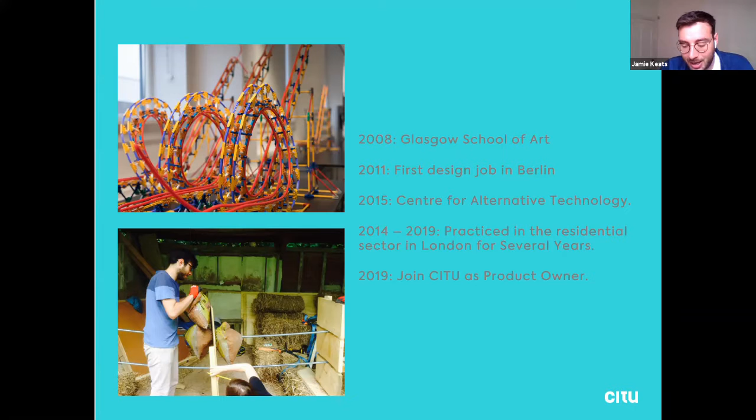Then I spent a lot of time working in London, focused on sustainability in residential practice, but it was always probably more of a second thought for people, something they wanted to do but never could quite manage to prioritize. Just over 2 years ago, I joined CITU, which is a housing developer in Leeds. The work I'm doing there is as product owner, involved in the continuous improvement of the build system. So I'll talk to you a bit about what CITU do.

They're a vertically integrated developer, so they do the whole stage of the process, and the mission is to do low energy, low carbon housing - sustainable in terms of transport, building in urban areas, building using natural materials, and very high performance homes that don't require energy, to passive house standards.

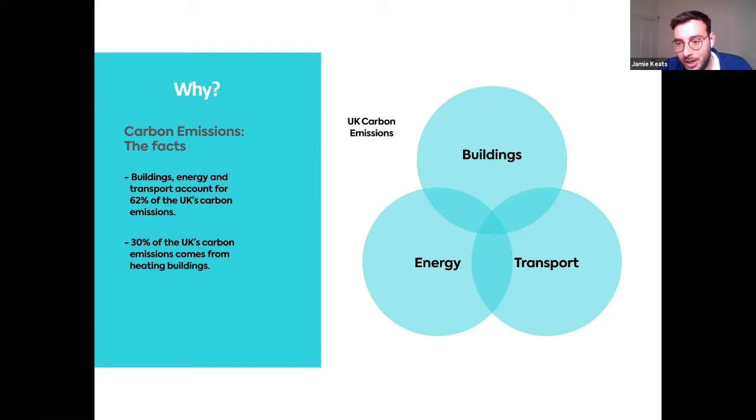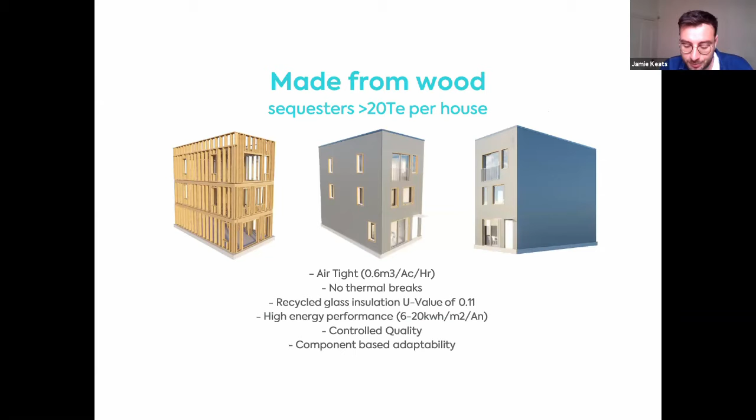So made from timber, air tightness is very good, and insulation levels are very high as well. And that's across all the projects.

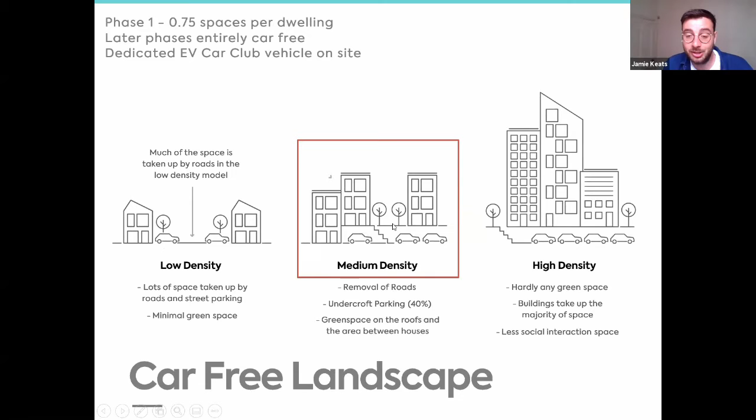As a development, they're medium density, so it's not kind of a suburban development like your typical house builder with 2-car drives, or your urban block, which is more common. It's this middle density which creates good landscapes, communities, but it's also walkable.

CITU has two main developments, one in Leeds and one in Sheffield. So I'll just talk to you about the Climate Innovation District, which is its main project in Leeds. It's partway, being built as we speak. About 60 homes are completed, and there's around 800 to go.

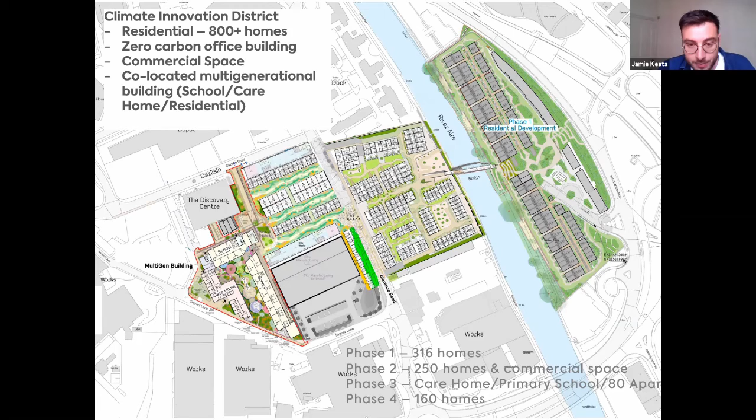The idea is really to create a neighborhood where people can walk and create a community as well, so people aren't dependent on cars. This is the pedestrian bridge that's gone in, and these are the car-free landscapes. Also you'll notice there's no garden fences - it's all shared green landscapes.

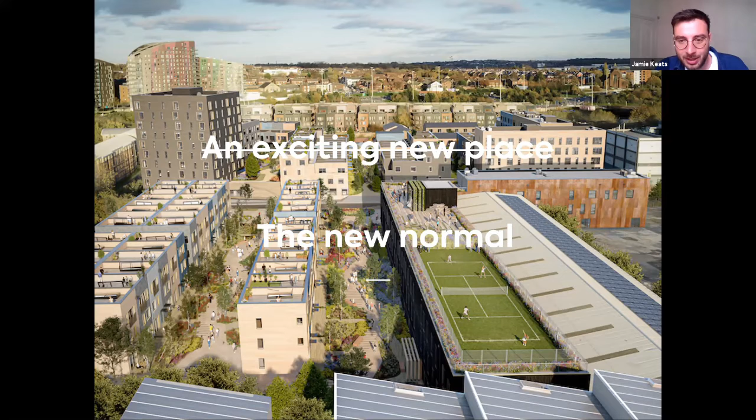This is the office building. It's actually due to open on Monday. The idea is to try and normalize it - at the beginning, the first residents to move in were taking a big risk on us, but we're trying to make it a normalized place to live.

I'll just talk to you a bit about the process of how we do it. As I mentioned, we're a vertically integrated business, so CITU is the developer. We acquire the land, then we also do the sales process at the end. And from a delivery point of view, we do the designs, we do the manufacture - we've got our own timber frame facility in-house, and we do the assembly on site.

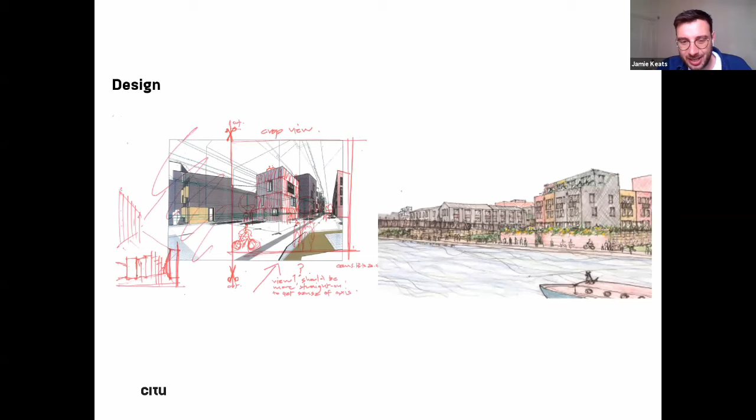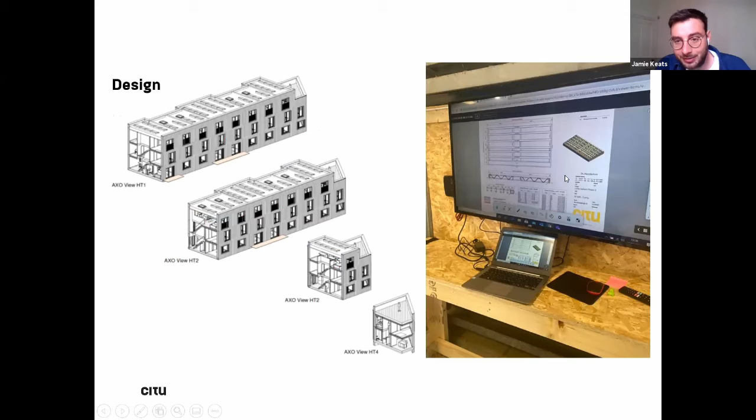That process starts like a regular architectural process of designing, very much focused around the streets, creating neighborhoods. Then it goes through the technical design process, and on the right-hand side, that's a screen within the factory. In the factory, we build the walls and the roof and the floor cassettes - it all comes together there.

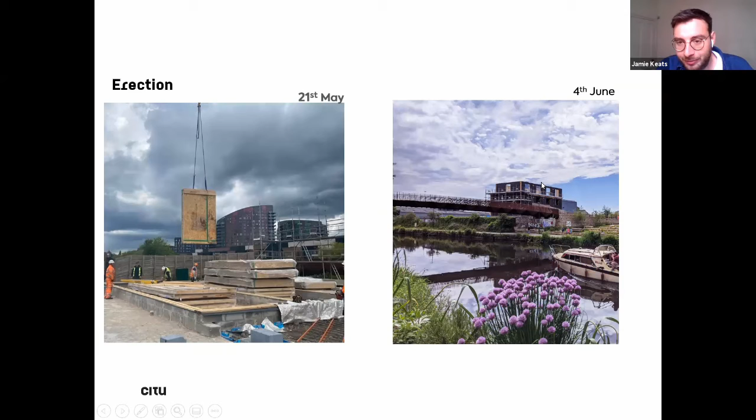Then it's erected on site, working roughly to one week per house, so that's 4 weeks to build a block of 4 houses, terraces like that. Then there's a fit out team, a team of 5 who are multi-skilled, and they do the joinery, the electrics, the plumbing. Between them as a team, we'll fit out the house in about 20 days.

So yeah, that's the delivery model. And then the areas we're looking to make improvements on is in our embodied carbon - we want to be able to calculate the exact amount of embodied carbon that goes into every house we deliver.

We also, PHPP is the Passive House Energy Standard modeling - we want to be able to do that for every house as well, at the early stages of the design process, so we can see the orientation of a building, or adding a window here or there will improve the energy performance. We're always looking to use local and natural materials.

Foundations is an area where we're probably doing it quite conventionally to how the rest of the industry does it. We're trying to move away from concrete and high carbon materials, and also addressing the amount of waste that comes out of our process. So these are kind of the areas where I'd probably open up the network and say, if there's any ideas of ways we can do these better, we'd love to hear from you.

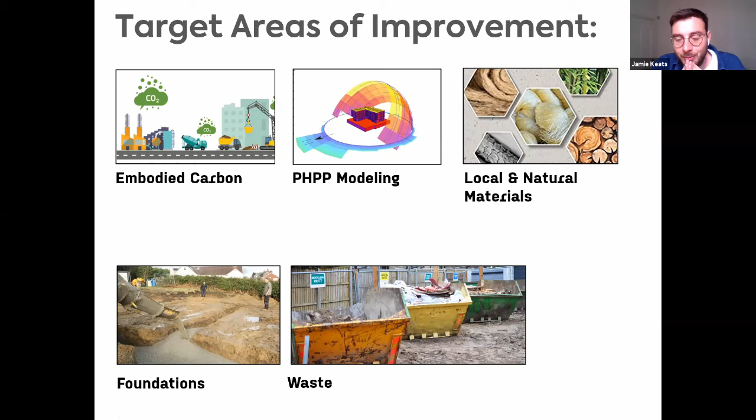Also love to invite you to visit. If you want to take a tour around, happy to show you around.

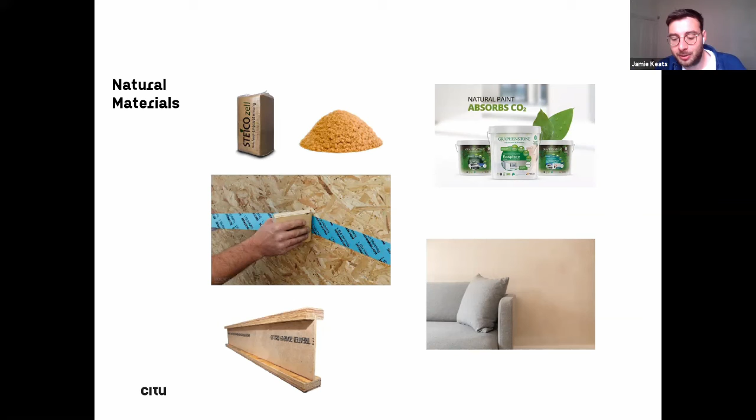These are some of the initiatives we've already put in place - using wood fiber insulation, OSB timber board as our air tightness line instead of a membrane, timber I-joists, clay plaster, and a graphene based paint, so more natural and more stable as well. These are all things we're exploring using.

And yeah, that's where I'd open it up to see if there's any suggestions from the network. Just to put an idea out there, it was at an event you organized previously, Iris, where someone from a paper company was looking at how they could enter the construction industry. So we showed them around our site, and they had lots of ideas in terms of building protection materials, like the plastic we put on the floors to protect them during construction. They thought they could come up with a paper solution that would be better, so they sent us a box load of paper products to try out. That didn't come to anything in the end, but just an idea of how we're excited to use more materials, and because we're vertically integrated, we maybe have that ability to support a company coming into that space.

Yeah, I'll open it up.